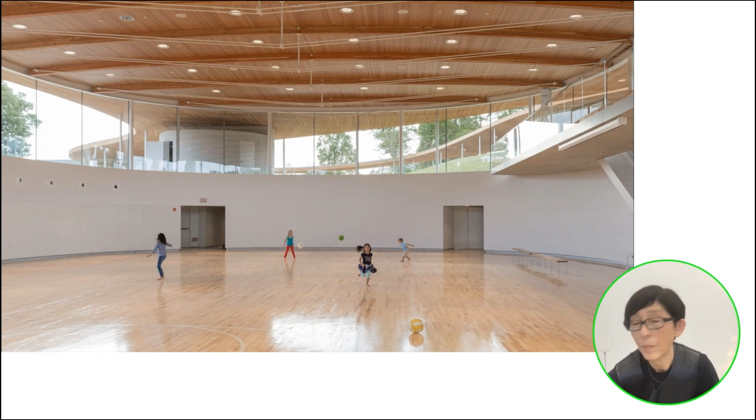The program includes a multi-purpose hall, community gathering space and library, as well as an athletic field and the BBQ courtyard in the landscape, and a gymnasium sunken in the ground.

This is our design for the Sydney Modern in Australia, near the waterfront. It is a horizontal building at the scale of the park nearby. The site is complex: it is over the highway and old oil tanks. There are some important trees that help to determine the shape of the building.

We created layers that follow the steps of the landscape, introducing many public routes through the site, both inside and outside. It is an architecture of terraces that blend into the surroundings.

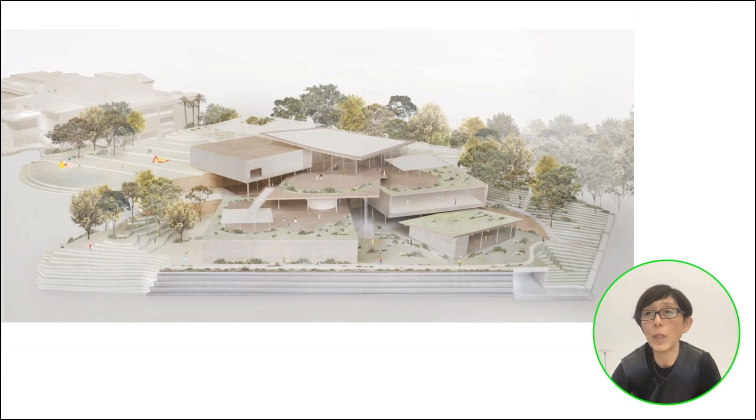It is now under construction. This view is from the entrance foyer. You can see the landscape on each level through the continuous atrium. And here you can see how the exhibition space opens, with a new view toward the sea.

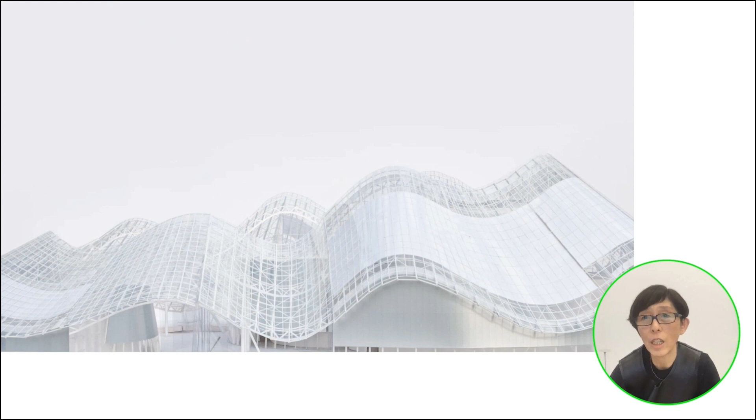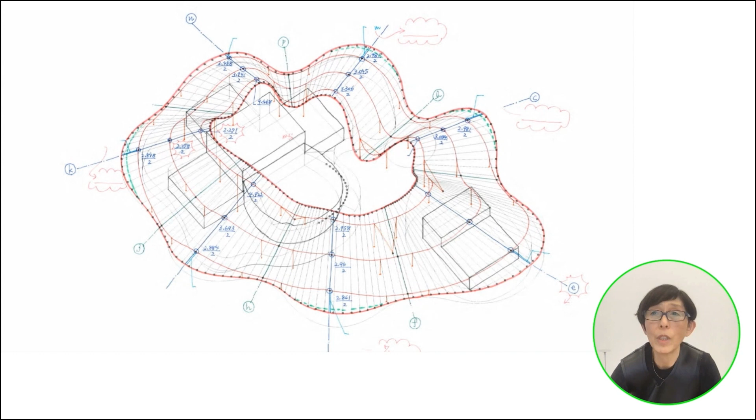This is our design for the Suzhou Shishan Square Art Theater and Museum in China. We tried to make a large canopy in the park. This canopy is a lobby for the two halls. The roof goes up and down softly, creating a diverse range of spaces. At the heart of it is a main hall. Here you can see the canopy and the continuity between external and internal space.

We are also very interested in cities and their different layers. This is the new museum in the US. We designed a series of stacked boxes that shift as you move between floors. In this way, we opened up the museum to interact with its surroundings, and the form echoed the pattern of buildings in New York. The facade is covered in metal mesh and was inspired by the industrial history of the area.

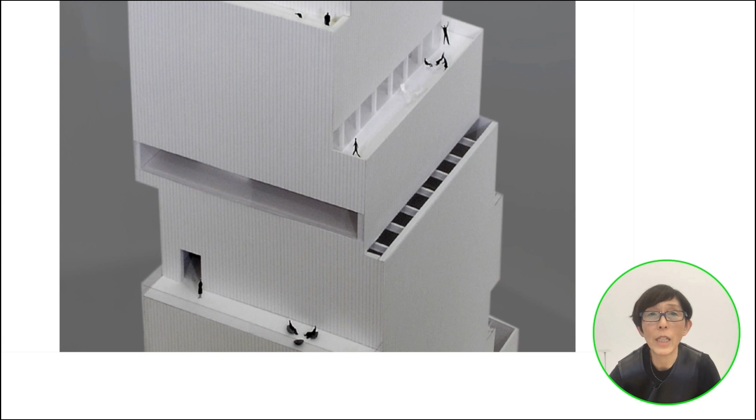Inside, each of the spaces has its own proportions and relationship to the city. This shows the entrance—we imagined that the street would extend to the lobby of the museum. This shows the terrace and how it opened to the city. Each facade has its own relationship to the city.

This is our design for La Samaritaine, a mixed-use building that includes a department store, offices, social housing, and a hotel. This site is in the very center of Paris, surrounded by history. The new facade is a curved wall of glass. The waves are defined by the rhythm of neighboring Haussmann windows. When you look down the street, you feel continuity. Our intention was to blur old and new to create a different landscape. The layers of the facade create deep reflection that changes according to sun patterns and time of day.

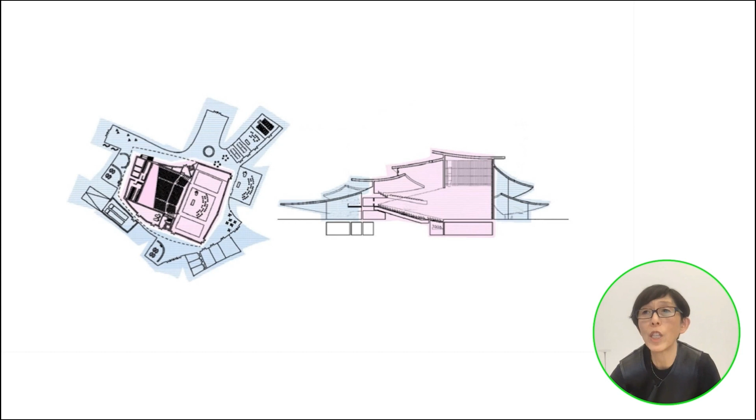This is our design for the Tsuruoka Concert Hall in Japan. We were inspired by the traditional roof architecture around the site, also by the mountains in the background. At the center is a large hall, surrounded by smaller spaces, each with its own roof. This creates many different types of space, from the very small to the very big—from low ceilings and bright spaces at the edge, to very high ceilings and a more intimate character in the main hall. It creates a stepped interior landscape.

We have always been interested in the idea that architecture can be like a park. In a park, there are many people of different ages with different purposes. Each cluster enjoys spending time doing its own thing, but the park gives them a sense that they are not alone, they are also with others. There is a respect for diversity. In this way, I think the park is a miniature of the city, and we try to create this atmosphere in our buildings. We try to do this in three main ways.

The first is by creating smooth and free circulation through the building. Wherever possible, we like to approach from all sides. This is our design for the 21st Century Museum of Contemporary Art in Kanazawa, Japan. It is a circular building with no front and back. People can pass through casually as they move across the neighborhood.

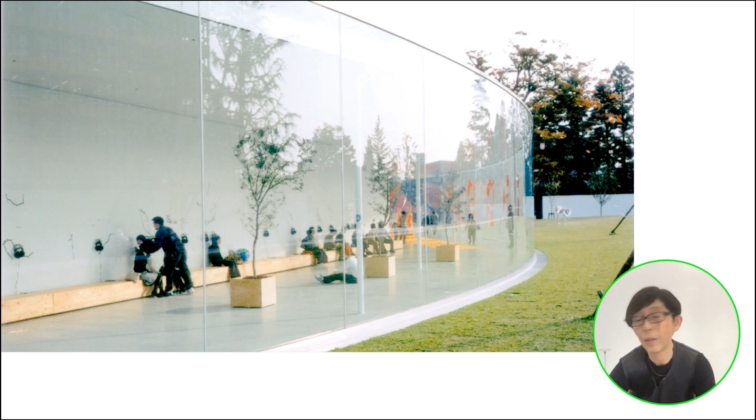The inside is a series of galleries and courtyards, each with its own character—it is like a village. A patio brings light deep into the building, and there is public circulation around the perimeter of the building. The building becomes part of the neighborhood.

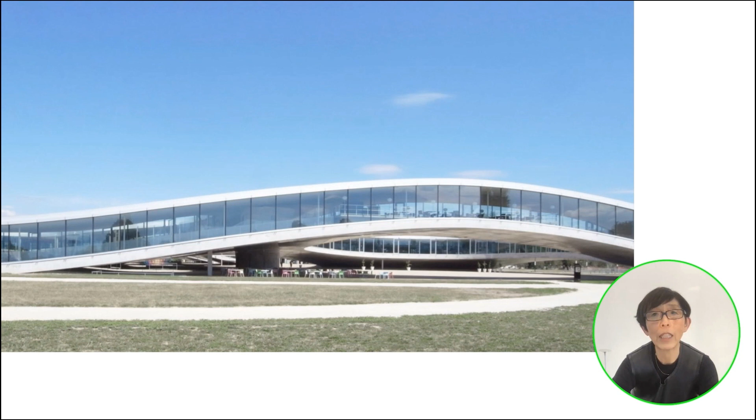The hill in the building separates one activity from another. You discover them as you move through the building. The shape of the building echoes the mountains beyond the lake.

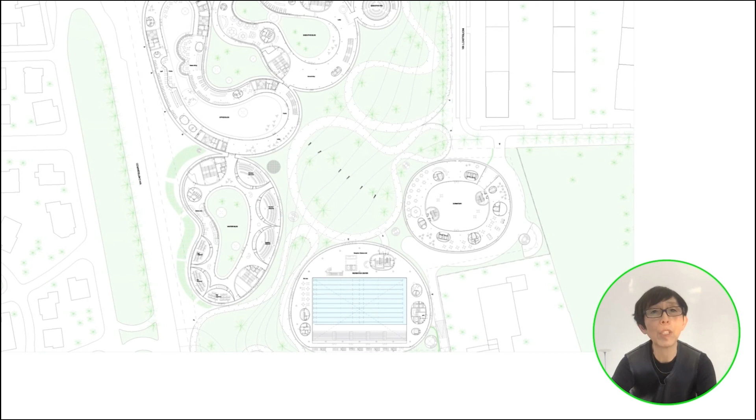The clusters blend together through the layers of glass and extend into gardens on all sides. Here you can see how they come together to form a park.

At a very different scale, this is my design for the Inujima Art House project on an island in Japan. Wherever possible, we kept the old houses and renovated them—this approach creates a dialogue between old and new. When the existing buildings were too damaged, we replaced them with small acrylic pavilions that become exhibition spaces. This is a beautiful garden we propose as one of the interventions. It is a place where the residents can meet and discuss the future of the island.

The third way we create park-like architecture is by creating soft boundaries. This is our design for the glass pavilion in Toledo, where many layers of glass bring reflection and nature into the building. We built a big flat roof to give the feeling of one space. Under this roof, we divided the spaces with glass walls that reflect the internal spaces and the surroundings.

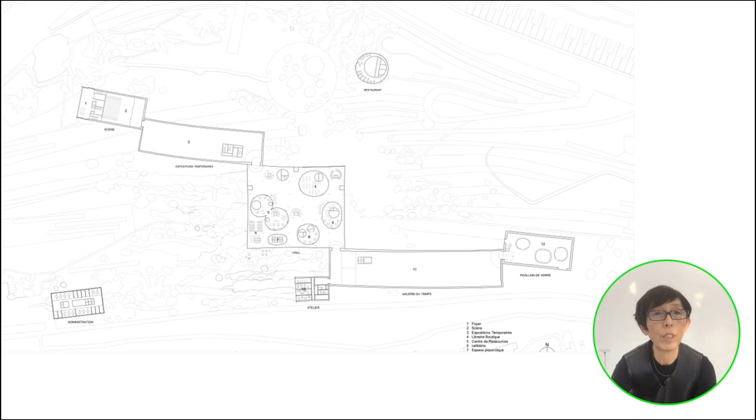Function in the main hall is given its own glass partitions. They create soft boundaries in a one-room space. Inside the main gallery space, the artworks are freely distributed, creating a new landscape people can move through as they choose.

As you move through the long 120-meter space, it becomes a journey through time. The softly reflective aluminum walls also help to dissolve the edge. The aluminum facade also reflects the colors of the sky, dissolving the building into the landscape.

This is our design for the new National Gallery in Hungary. Our intention here is for the display of art to feel like an extension of the park, so the edge is a series of soft boundaries.

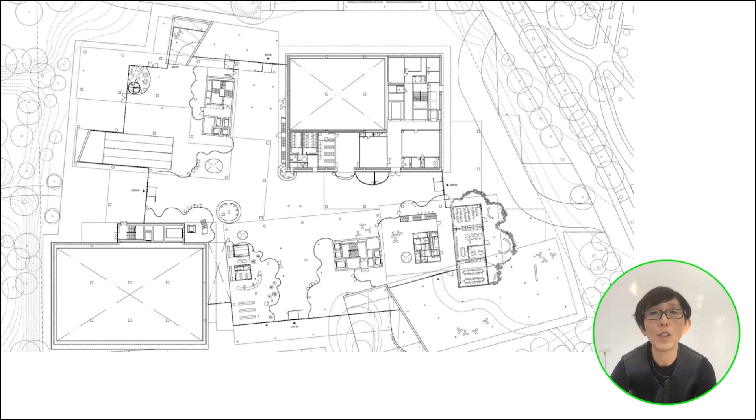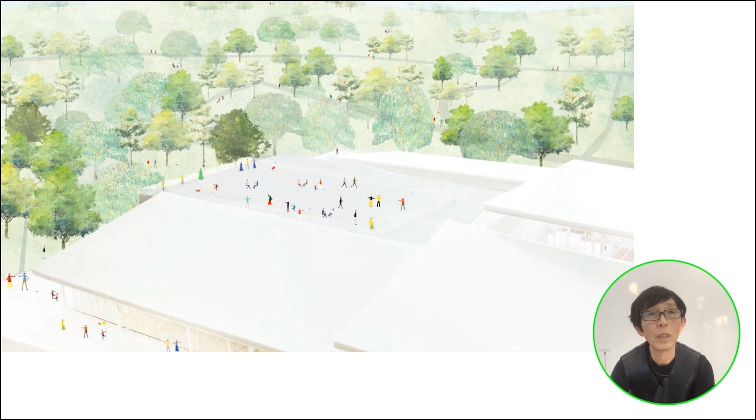As you move across it, you find many different activities. They open onto a series of platforms that creates an open and vibrant space. Like a path, these routes and terraces lead you all the way to the top of the building and offer views out to the park.

We are also keen to bring a specific environmental solution to each project. This is a project in Essen. It is close to an old mine, so we could use geothermal energy to heat the building. We developed a new system where the geothermal tubes are embedded in the concrete facade.

Here you can see the system under construction. This means we could create a very thin facade that makes the big blocks appear transparent, both from inside and outside. Bocconi achieved a LEED Platinum certificate.

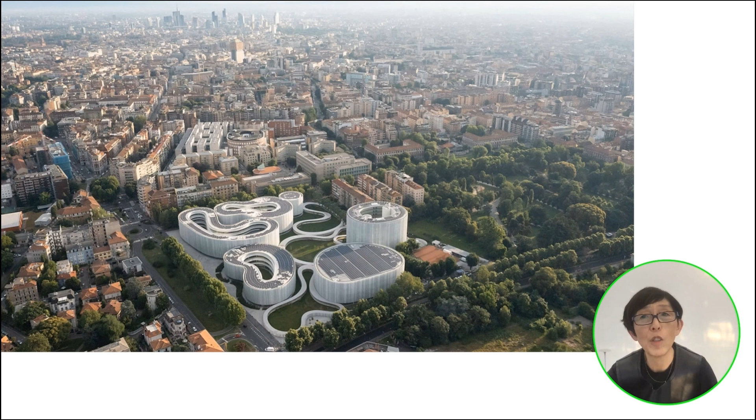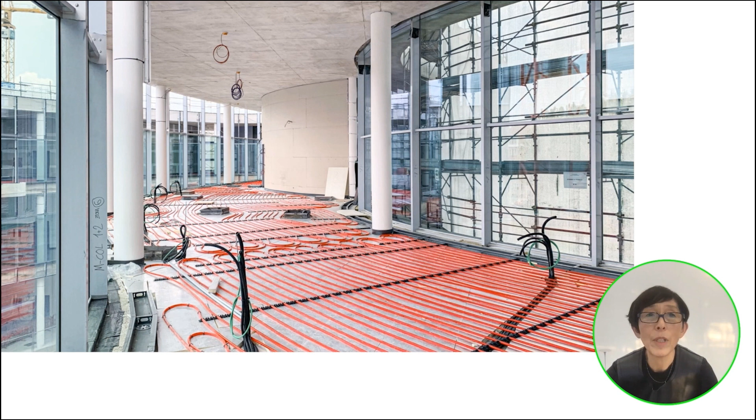In this photo, you can see the roof with the PV panels that provide energy to the building. This image shows the installation for the underfloor heating system using a geothermal source. While here, we use separate machines for each classroom to avoid a centralized system. This was very efficient in terms of energy consumption.

This photo shows the shading along the windows. We also use a mesh for the upper floors to protect the building from the solar gain and optimize the thermal performance.

Again, this is the Sydney project. When complete, it will be the first public art museum in Australia to achieve the highest environmental standard for design, with a 6-star Green Star rating.

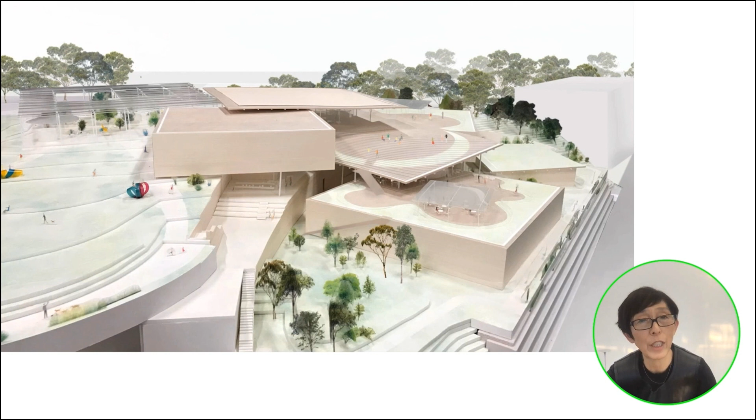Thank you very much. So thanks for that lecture, and we fortunately had a chance to ask a follow-up question, which is: buildings can significantly change the landscape of the city. The site proposal has 3 different elevations from the river to the railway track. How much should cultural venues change this kind of urban landscape?

This type of project should work on many levels: urban scale, neighborhood scale, human scale. At the urban scale, the importance of architecture is to create a sense of place. This type of venue can become a symbol of change and regeneration, a new image for the city. This project is an opportunity to transform a traffic intersection that sits in a pivot position on the river. It shows continuity with its environment and the local culture, but at the same time creates a new landscape.

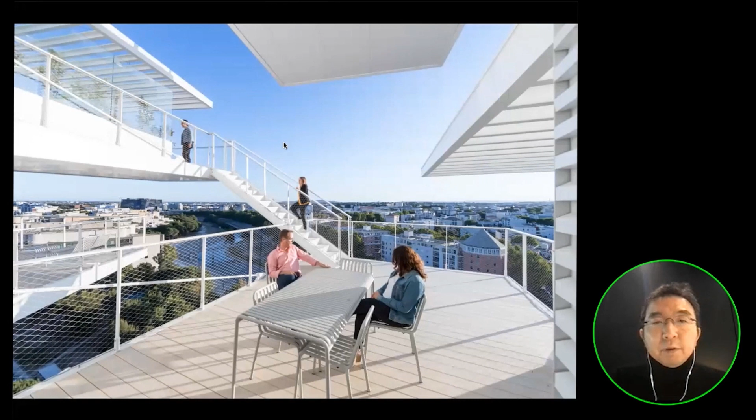This is another view of the balconies. Sometimes the apartment is a duplex with 2 levels, and then the balcony is 2 levels, linked to each other. This is alongside the river, so we respect the flow of the green areas, green parks, even within our plot.

So that is why the building is more close to the roundabout, respecting the view from the apartment above. And then finally, the shape is more like a curved organic shape, which is why we have a softly organic expression together with the balconies.

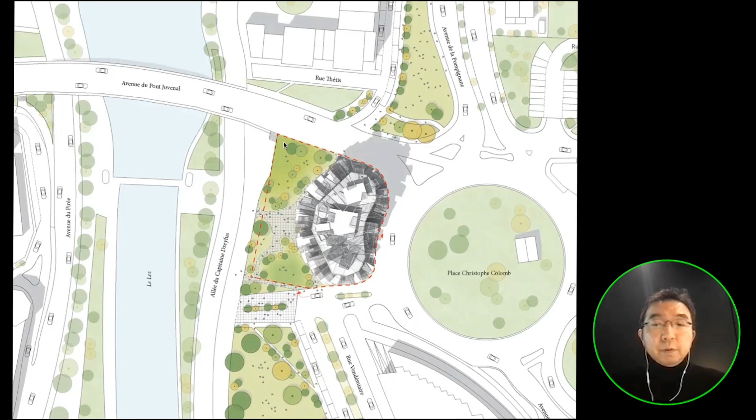You can see, even from outside, not only between the people who are living there but for the people of the surrounding neighborhood, this apartment is very open. So people can feel they are living together with us. It's not like isolated volumes of buildings, but more like an open field.

It always has interfaces to make communications to the neighbors, to the people living there. So this kind of feeling, the many different links, relationships, connections, and organic interrelationships are the very important point for this project. Again, yeah, this is a view.

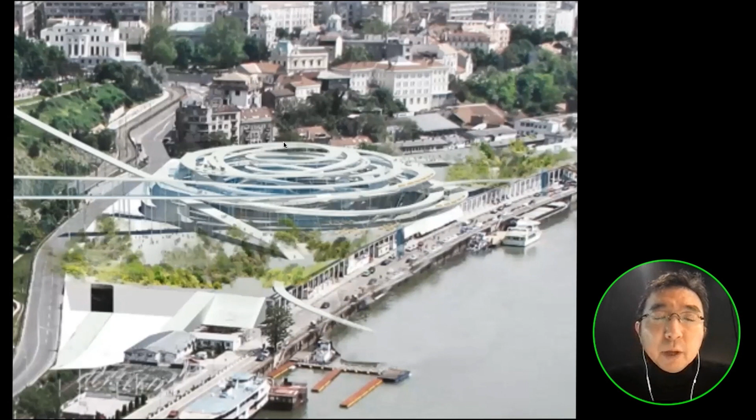So the second one, it's from more than 10 years ago, was a cultural complex right next to the river in Belgrade, the Sava River. This is the view, and the location was very special because it's right next to the old city of Belgrade, and on the left hand you have a heritage fortress area.

And on the front side you have a river. So historically, geographically, the surrounding is quite interesting. And then they wanted to have this kind of urban plaza with the cultural and commercial programs in it.

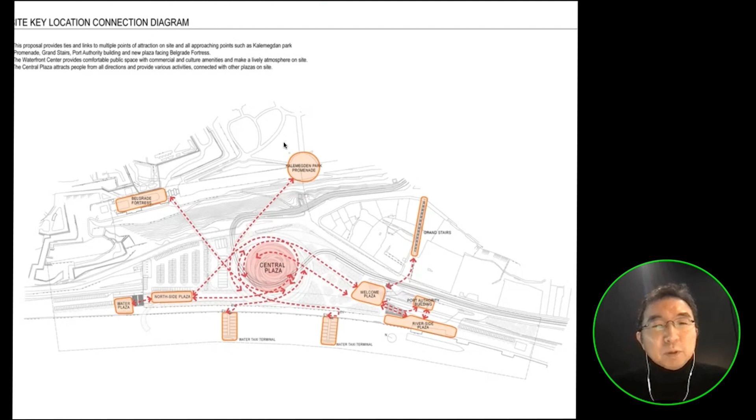This was also intended to be like the hub for the traffic. So the trams, the taxis, water taxis, and the buses, and of course the pedestrians - all of those kinds of mobility are coming here together to make the junction and the links and so on.

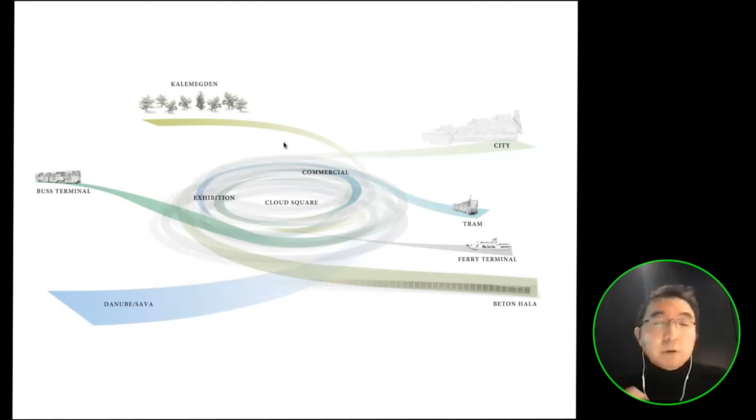So we thought about the characteristics of the plot and the characteristics of the programs - it's like all of them are flow, in a sense: the flow of the river, the flow of the traffic, and the flow of the histories. And then all the flows come here to make a spiral, to create a really central plaza in the middle.

But it's not like a static plaza - it's more like a plaza with a dynamism in it. So keeping many different flows from many different directions, linking the old city to the fortress, or the river to the shopping areas - all of those flows are coming here. So it's like a hub of the flow.

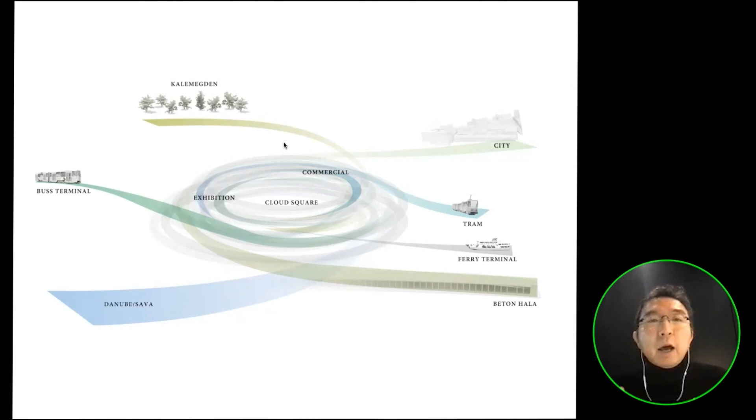And then we thought it was a fantastic idea to give the shape of this flow itself as architecture, so the flow itself becomes architecture itself. That is why finally we made those kinds of spiral flows, which are like floating slabs. And then we have the interior spaces between those slabs, and in the middle we have a central plaza.

So that all the people can see this central focal point, and all of those trams and traffic are coming along those flows. So all of the functions and all of those kinds of reactions to the surroundings are solved by the architectural language of the flow.

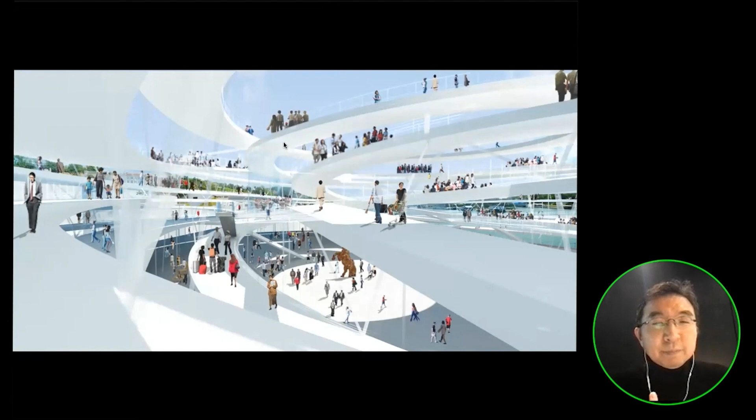So this is the view in the middle of the slabs, the floating slabs. It's like an amazing mixture of architecture and landscape and an urban strategy, and plaza and street and the flow itself. So there are no clear divisions between architecture and the city and the landscape here, but all of them are melting together.

Yeah, we won the first prize in this competition, but finally, unfortunately, the project was stopped. Still, for me, it's quite an exciting project, because it is something beyond the normal, single definition of architecture - it relates more to the surrounding context and starts to melt all of the urban situation, architecture, human behaviors, human flows, and the landscaping and nature together to create the place and a field for the people.

So this is the last one I will introduce today. It is just finished in Budapest, the Forest of the Music. It's a house of Hungarian music.

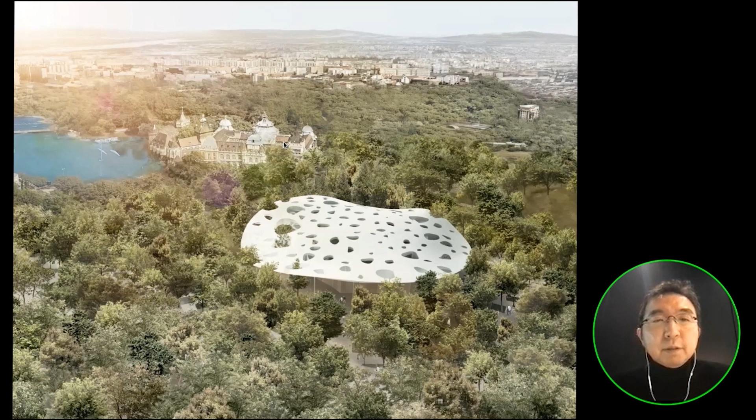This is the rendering we made for the competition. The site is in the middle of a beautiful park, a beautiful forest, and the whole park has so many different cultural buildings. Some of them are quite old, and some could be new ones, like our building. This forest feeling is the starting point of our inspiration.

We thought it could be like a dreamlike experience to listen to music in the middle of the forest without any architecture, playing in the middle of the forest, playing the music, and then listening to it. That was the very starting point. And then we tried to translate the forest into architecture.

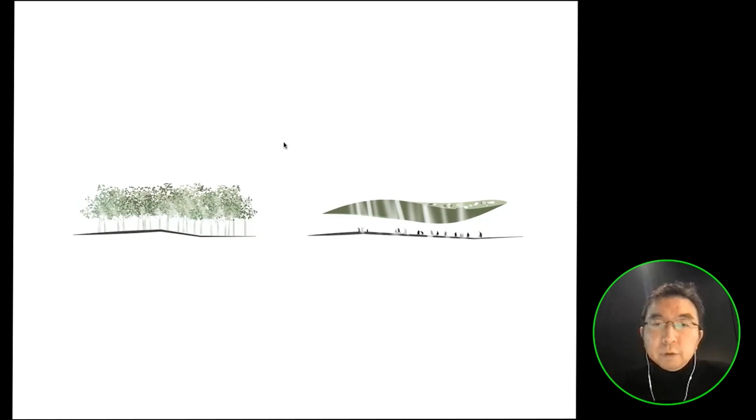Of course, we had to satisfy complicated functions, because we have the music museum, music performance spaces, and music education spaces. Finally we made a large floating roof. On the basement we have a large, huge exhibition space for the museum, and within the roof we have education programs.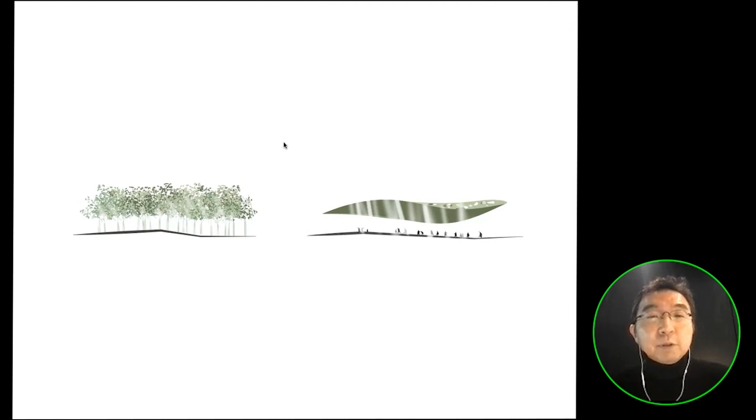On the ground level, covered by the roof, we have a transparent music performance space which is really open to the forest. So people could feel they are playing music in the middle of the forest, and the audience could feel like they're listening to the music and the concert in the middle of the forest.

So this is the site plan, and these are diagrams showing the layout of the programs. Finally, this spring, it's done.

It's floating volumes, and these transparent areas on the ground level are like the open foyer, lobby, and performance space, like a music hall. This is an aerial view.

Then in the spring, all the leaves get green, and it will be really in the middle of the green forest. So this is the roof photo.

We have many openings on the roof. Some of them are skylights, some of them are perforating to let daylight into the concert hall, and some of them are just open holes, which have existing trees going through the roof.

So it's more like not dividing the architecture and the forest, but the architecture and forest are melting, intersecting with each other, coexisting with each other.

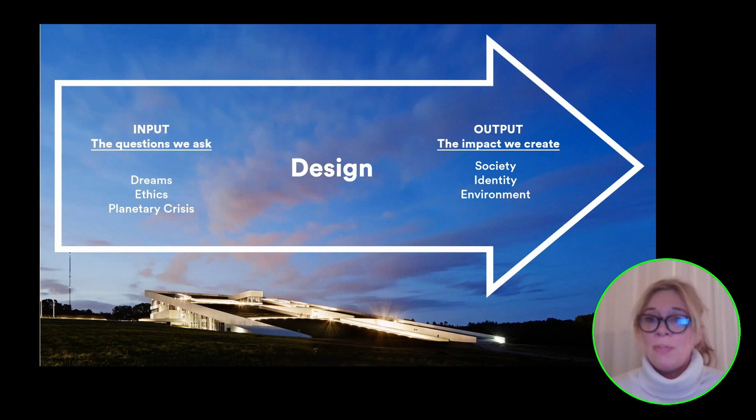And afterwards we talk about the impact we create, both on society, on cultural identity, but also environmental issues. So design is somehow a medium actually to achieve things. And exactly both...

Urbanism and cultural buildings are the two typologies in architecture that I would say create the most emotions and touch upon a society's ethics. This is where you involve society, you involve people, because it is public places.

And these are just two examples. It's one from Harpa, a concert hall I will show later, and then it's from Gdansk Imperial Shipyard. And these two images also show that both cultural buildings and public spaces are gathering places. This is also where people create memories and meaningful experiences. And this is why these places become so important, not only for cities and nations, but also for architects.

This is why we are all here tonight. And one example is, of course, the Gdansk Imperial Shipyard. This is where there was a labor strike in 1970, and it actually led to improvement of labor rights and political structure.

So, of course, when we did the urban transformation of that shipyard, that was in our mind, to unleash that cultural heritage, working with a new agenda for the Gdansk area. So, of course, building upon a place, on a site and a destination, and building towards a new future. And these are some of the images from the area.

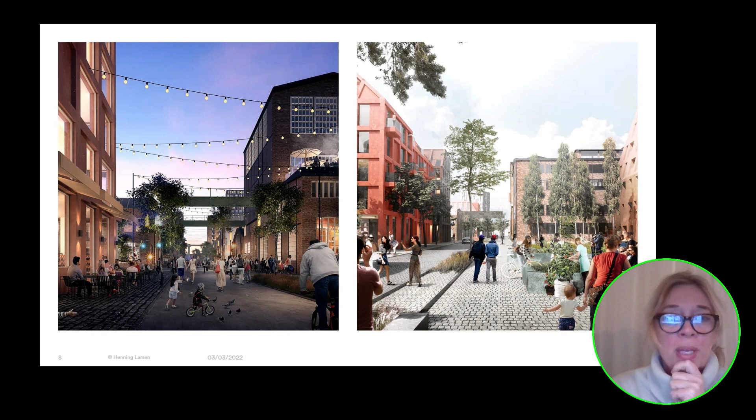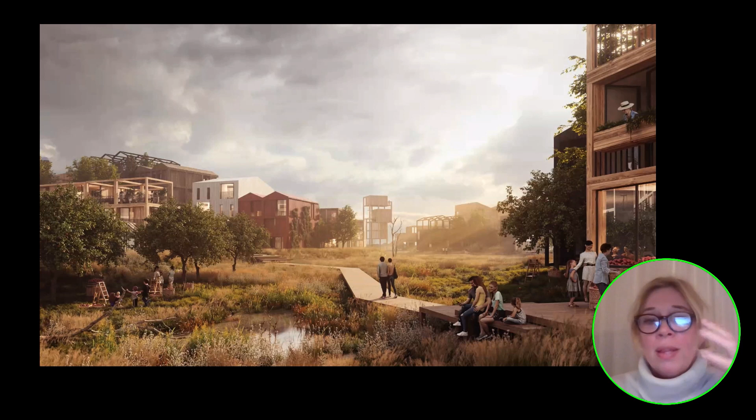And this is why we created these three very organic islands where nature could flow in between these small islands. And you would also create a U-shape block typology where nature could go into these courtyards. That was very important for us, that the nature was very dominant in the plan.

And the whole city is for 5,000 inhabitants. It's all made of wood - that's a different story that I'm not going to talk about now. But for us doing this, the urban approach here was preservation of biodiversity and actually reinforcing that. And that led to a lot of good discussions with all citizens on how design can also benefit to create a future-proof urban scheme.

And let me move into architecture, because design and architecture can be a medium to create cultural and societal change. I think we're all aware of this. And I think what is important for us when we work with this, we have to think about exactly how we do the design. And this is the opera in Copenhagen we did many years ago.

What you see here is that this place has become a destination, not because of the auditorium and the operas taking place inside the building, but because of the big roof, placement at the inner harbor of Copenhagen, and all the things going on around this roof.

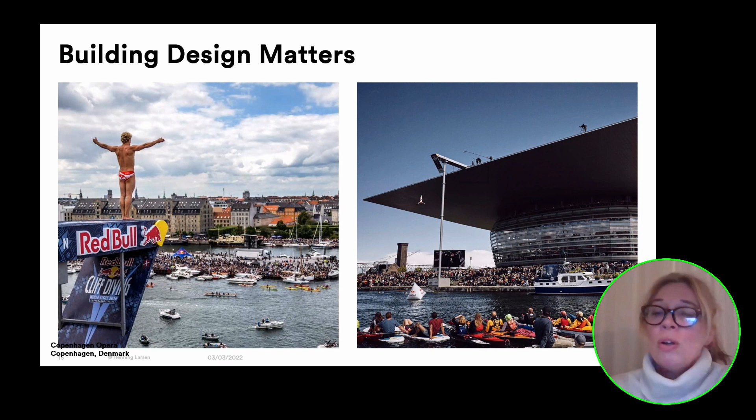So suddenly you will have a Red Bull competition from the roof diving into the harbor. And of course the opera becomes the backdrop for this event. It's also about creating plazas around the architecture, having the possibility of actually making outdoor performances, or having a more open-ended, wild, you can say art culture around the building. So you will have something that is very formal, and you will have something that is not so formal and more unprogrammed.

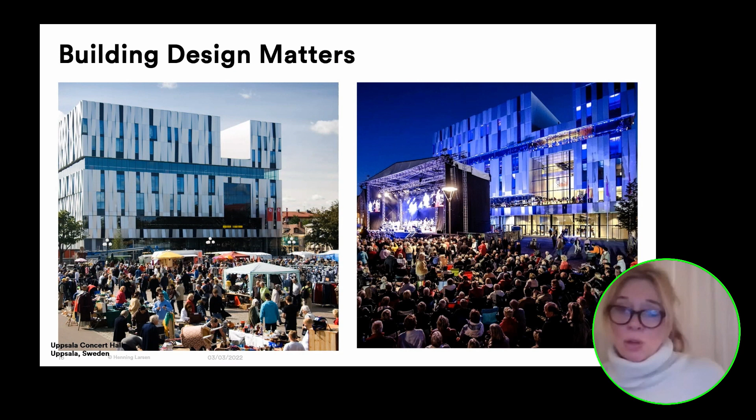But by actually turning this into the city, we made a plaza in front of the building, and this building became a community space for Icelandic people. So going from a more formal way of understanding cultural buildings, we broke the building down a little to have the foyer and the lobby activities in front of the house, becoming a public area that could be inhabited all day and all night, during all week.

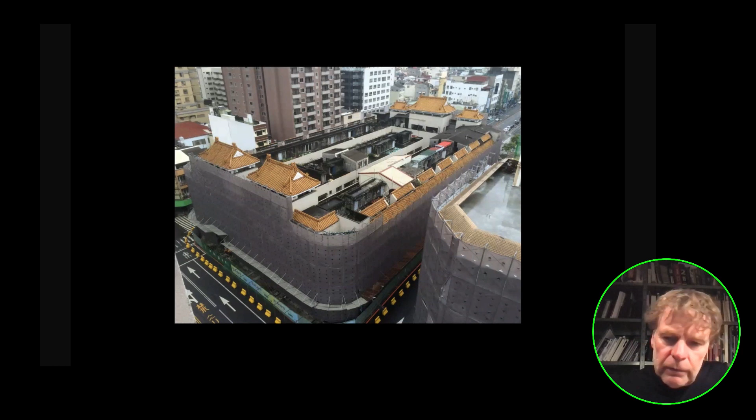So we were asked to think about this Chinese department store and transform it into a park. So what to do when you have this giant building? You ruin it. Literally, you turn it into a place of memory, and you flood it. Why flooding? Because then it can become a cooler place, cooling down the city and therefore attracting people. I was surprised by this simple act of transforming this building into a swimmable ruin, and maybe because people liked this drop in temperature.

It was also a moment that Asian culture suddenly popped out in European dress codes. I mean, this could have been in Denmark, but you never expected that in Taiwan. It was a place where we concentrated on the materials so that you would have a dengue-free environment where you could swim all over the year, day and night.

So here you see people queuing up at a certain moment to go into this park, and it's completely open and free, and you don't have to pay anything, and there is no cafe or bar. You take your own sandwiches and your own rice and sit and watch each other and enjoy simply the temperature drop in that case. So learning from that, how to attract people and how to comfort them, how to give them this freedom, and how to make it hyper pleasant in a way that it's not like a shopping mall, of course, because they try to do that also, but the distinction is freedom is what we try to attend to do in Tainan.

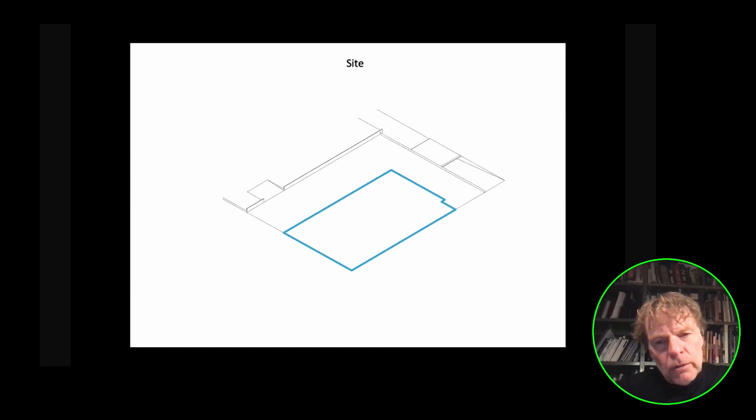On this park, in the middle of the institutes, you have to make a form that doesn't copy the others, or that absorbs everybody to participate in this operation. So how to do that is when you have this site, when you have to respect some of the logistics on the site. And this program is fat, 15,000 square meters on a park.

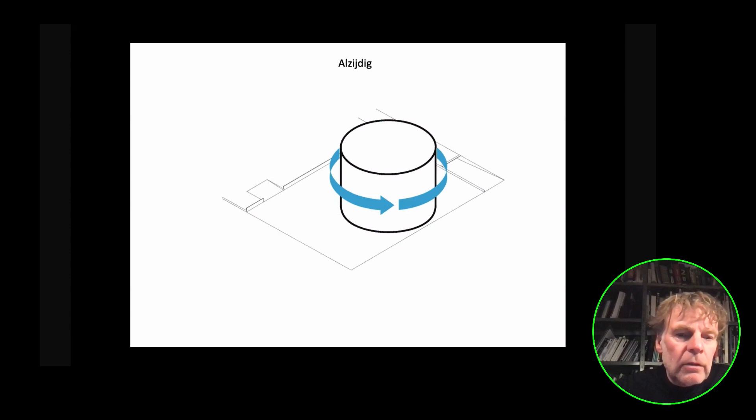How can you do that? How can I keep my innocence as a landscape architect to allow for a building that is loving the landscape, even with a mainly enclosed piece? So we made it turn into a round building so that you can walk around, no dangerous corners.

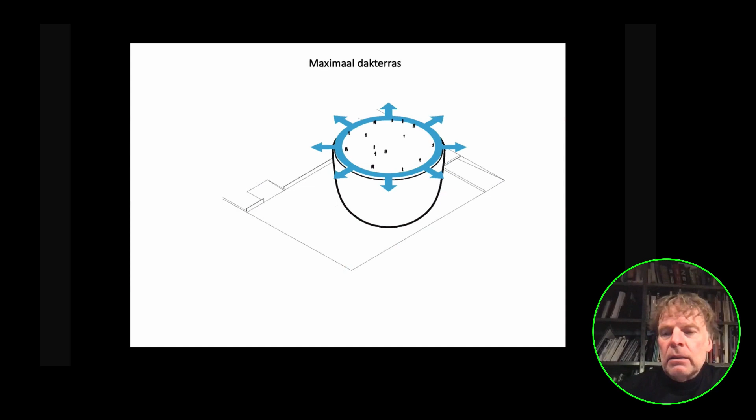We made the footprint almost nothing so that water can go below and the plaza becomes the biggest. And then you can have also like a roof, which is the biggest possible by not making it too fat. That leads to walks around it, like you can see here.

Then we clad it with, say, mirrorish glass, and that has an effect that visually you have a dramatic enlargement of the site. You can reflect the plaza, you can look around the corner, you can enlarge the sky, like in the famous Dutch paintings of the 17th century.

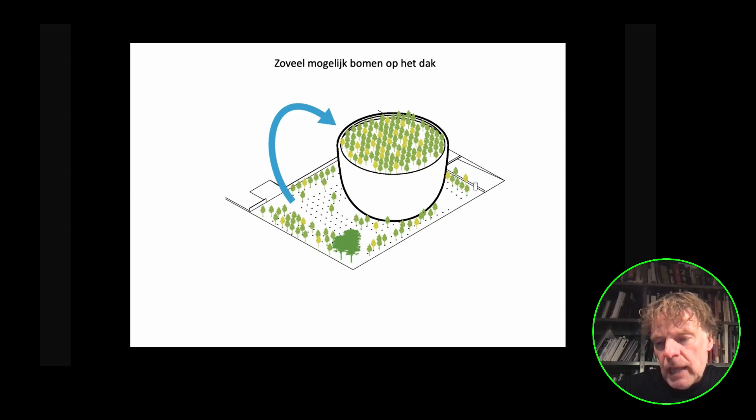And then you have also a place where you reuse the old trees and put them on top of this depot, to compensate this act of living with nature and treating it well. That creates a new landscape on the floor for activities, and it forms like a new room in the sequence of gardens of the museum park.

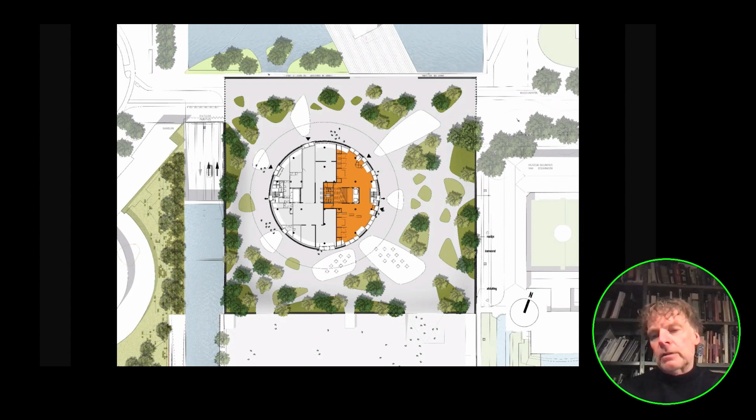And they just come into this new forest on the ground. In orange, you see the public part, and in the other part is the private part, as small as possible. You go up to the art, which is higher, of course, +7 meters, to protect itself against the sea.

You come in a central void that goes all through the building, where you can walk around, so that you can go into all the different climates, 5 climates in total, because of the different art pieces, and you travel through the central void where things come out and are shown to the world, day and night.

The museum is open. And on every spot, there is an extra activity to restore the building, to have a school class, to look at elements, to share it. And you can enter every piece wherever you want.

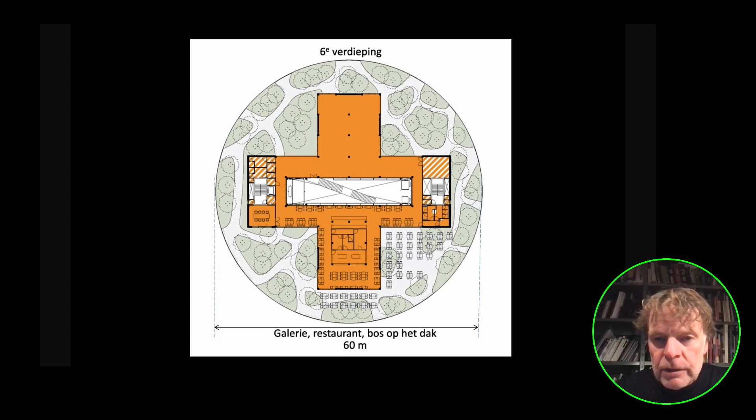And there you can open up the fences, and you can find your painting of what you would like, and end up of your journey in the gardens where art is exhibited, in the gallery restaurant where art is also participating. So it's a true, say, piece of collaboration.

It is, as I said, also a project with many projects in a project. And I want to express that because I think public art, like public buildings, are inviting people, and that would mean that these many collaborations could lead also to a new Gesamtkunstwerk.

We presented that in the Monocle at one moment, all these authors that are participating. I'm just an urbanist in that sense and try to make awake all these different artists that are working on it.

Yes, the word Gesamtkunstwerk becomes then another word. It's not made by one person, like in Austrian times, it becomes made by many. And I'll present some of them to you.

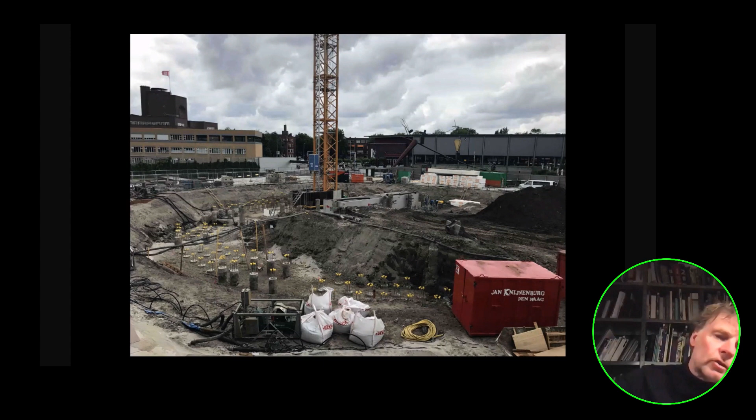This is the vessel makers. It's not an artist group, they're engineers. In order to not touch the water, the thinnest piles had to be invented. And on top of that, this vessel is made as an Ark of Noah, due to its balance of weight and floating, making this vessel a tool that can survive the floods in the future.

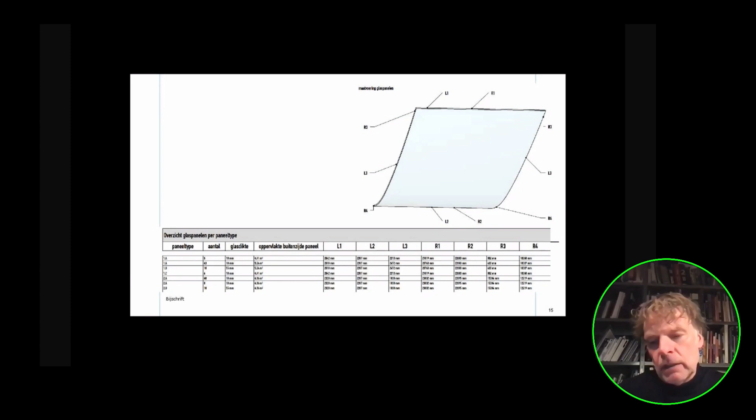We have the mirror makers that were based in China, where we bent glass in all directions and invented a new kind of mirror material inside the layers, so it could be shipped, tested, and awarded. No brown glass; it should be as neutral as possible. And the good thing is, it's recyclable. You can ship it back, and then you can make it better when it doesn't fit.

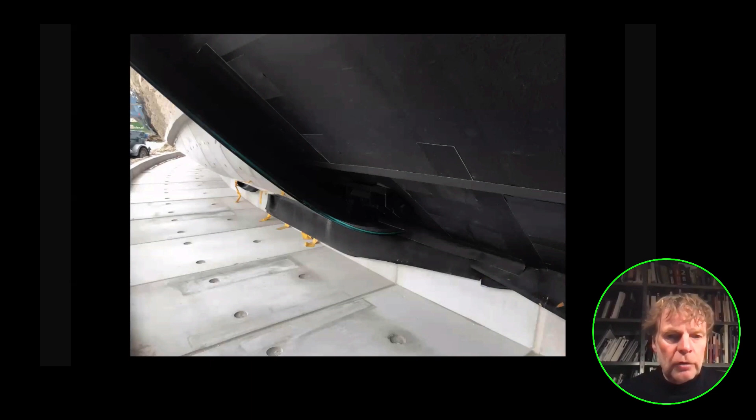And of course, it should not touch the earth, so the lowest part is also horizontal and has triple curves. The door makers somehow made this kind of simsalabim doors, like Thunderbirds 5, where you could go in and wait for the door to open. That's also a group of people that could only do it themselves.

And of course, the curators made, in between our stairs, so many boxes where you can meet art from different perspectives. You can look from the front, to the back. You see the signatures, you see how they are pulled out of the archives and then shown in a certain way for curators, for other kinds of museums.

The windows are an important piece of art. They show the art in different climates. And of course, this is how to pull out the art in an almost democratic way. You can find your own collection that comes back to it. It's a project within a project to understand that.

And then people show their pieces of collection, like this carpet on which you can stand and look down or up. But also the food makers are part of it, making these kinds of flippable tables to live with art in the environment.

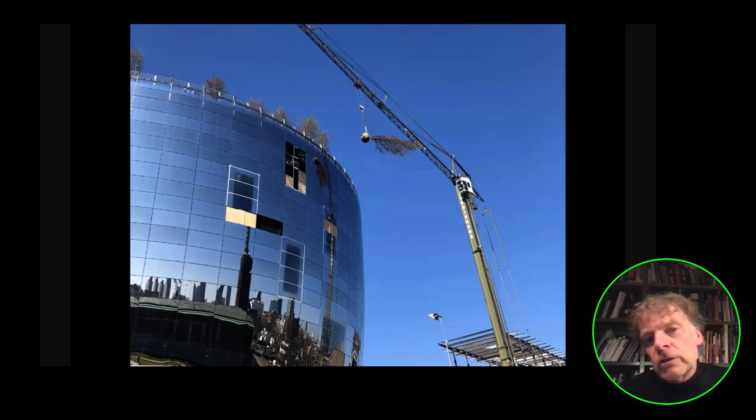Or the forest makers, landscape architects who train trees to grow horizontally, put them on top, and unfold the roots so they kiss each other. Then in a year, you have this effect, and even with last week's storms, it becomes like a forest to walk in. Next year, you'll see art emerging from this forest, placed in all those in-between spaces where the archive can show itself.

And with that, I think we have this group portrait of all these collaborators, but also of the city. This is the last, one could say, object in the city that loves all the objects of Rotterdam, and they come together in this place.

I end tonight with Pipilotti Rist in Rotterdam, with the canvas she made, presenting films on top of the plaza with mirrors in the building. It becomes three-dimensional, and she made this experience even more beautiful.

And it's a storyline that appears every night now in Rotterdam, and after COVID it's turning into a place to catch up with each other. And then indeed, reactions: today's Instagrammable pictures, but also this article in the New York Times, which says that Rotterdam, with this picture, has a nicer skyline than Manhattan.

So chapter 4: what can cultural buildings in general do? I'll give some categories. They can be guiding, as these examples try to show. They can be exemplary on many levels: on sustainability, on inclusivity, on beauty, and on politics too—we cannot avoid that part. But maybe most of all, they can help us with hope and perspective, especially these days.

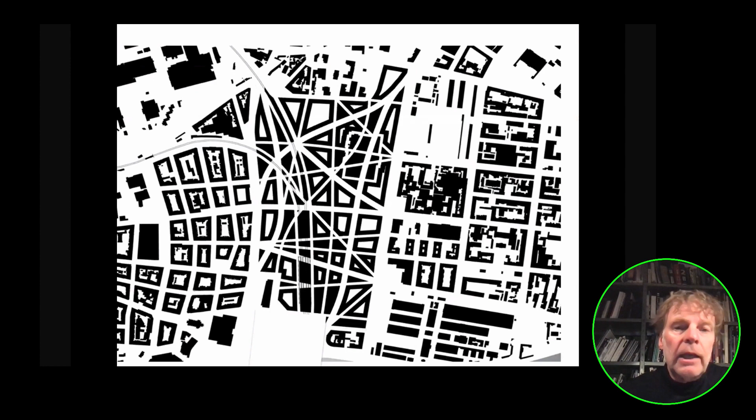2006, I look back to Bubny, where we tried to work on this competition, where this site is now there. And when you look to the site between Letna and Holešovice, it is we try to make as many streets that link to each other, and then keep a place open on the Vltava to present itself. That would transform this into a unification of the different districts. Prague would continue while keeping a place to celebrate on the background of this city.

It's new jewels. And then 2021, I'm happy that that is somehow happening in another language, in architecture, where in red you see the new place appearing with the background Bubny as a continuity. It's in itself also a paradox of continuity and speaking out is happening on that side.

Chapter 7, again, the paradox on beauty that I see in Prague and in the Czech Republic. You see, of course, cultural institutions like this, which are stable, classical in its sense, with an interior that has Baroque-ish elements in its most beautiful way. On the other hand, you see new kind of modernists coming up with a very poetic way that celebrates some parts of the culture of glass and crystal, and that continues in some of this, say, doubleness of Prague.

When I go into this building, I see incredible art installations made by different artists in glass, where a sea of glass is continuing the Vltava in this project, and where Moser and others do it almost in a cubistic way. I see this also as an ecological paradox between stone and glass that is in this.

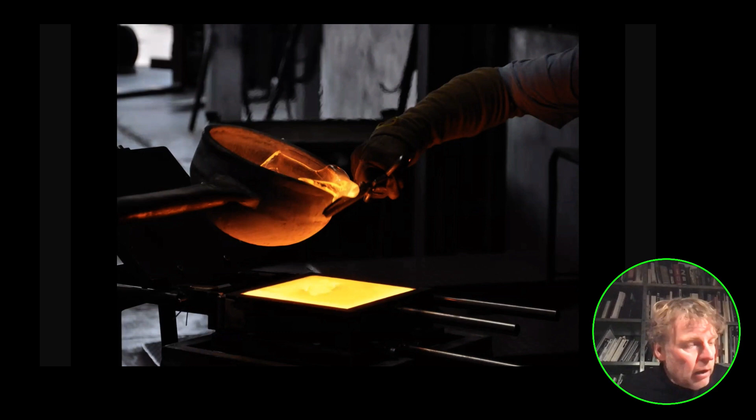And I'll take you for a moment to Amsterdam, where again, I can have glass, I can melt it again, and I can turn it into stones. And for me, somehow, this is a symbolical way of dealing with beauty and stability. Chanel did make it in the crystal houses with us in Amsterdam, where they become solid, where they lighten up, and the interior becomes sprinkled with it. And then when you go obliquely, it opens itself to the world. This Amsterdam house shows also this kind of paradox that we are facing.

Paradoxes are beautiful, and that's the learning lesson of Prague. But of course, it needs courage in the end. And that's my 8th observation on what a public building could do, and especially in Prague, and especially on this moment.

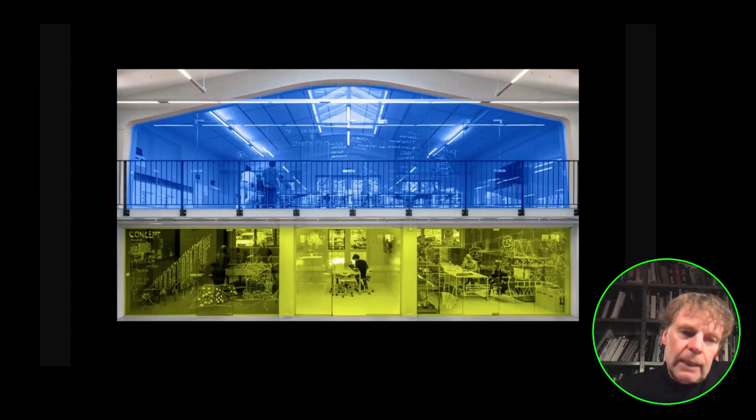Enlarging beauty and art should be responding to that, and by a sparkling, eye and ear catching answer is what we try to do. And then when I take this picture from a cab and look to the other building, how these institutions can somehow not only protest but find an answer to this aspect, then I try to mimic that a little bit in my office the last week, inspired by you, to see that somehow in it. And I see that as a very important part of this coincidence that this competition is happening, to make this yell out of that, which I think is the most public answer that this specific building can do in this time.

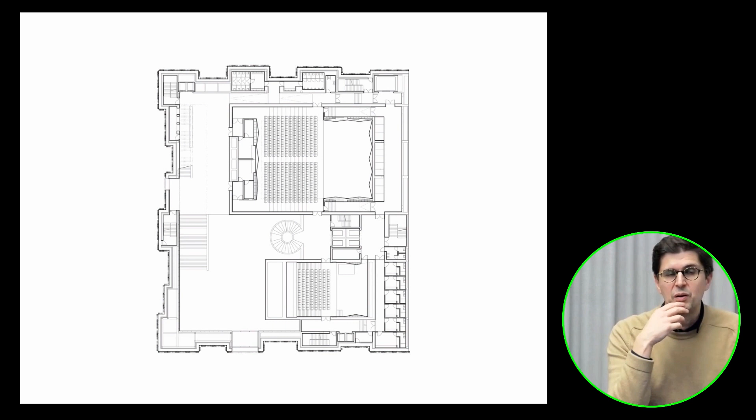Try to recover the importance of an element that expresses somehow a new identity, not just for this neighborhood or this site, but for the city too. In the case of Szczecin, the building plays with references of the surroundings, but also with the idea of freedom, playing with the roofs, playing with the skylight. I think the building tries to express a new identity based on the main characteristics of the site, but at the same time tries to explore how to transmit these ideas in a strong and expressive way.

The Philharmonic is a place that basically needs to fulfill all the interiors with activity, needs to provoke the public, needs to transmit to the public the importance of the site, and that's why the building inside is composed basically with the idea of public space.

The interior of the Philharmonic, in this case in Szczecin, is just a kind of public loop all around the uses of the Philharmonic. It tries to provoke the idea that a square inside the building would be the perfect spot for sharing moments, sharing activities, and sharing the importance of meeting all together in the same place, in a cultural place, in order to listen to jazz, live music, which is the heart or the soul of the program for a philharmonic. And in this case, in Szczecin, that was basically the main target.

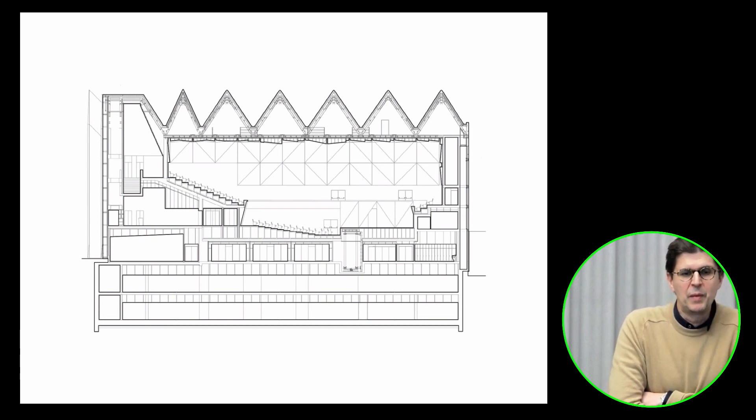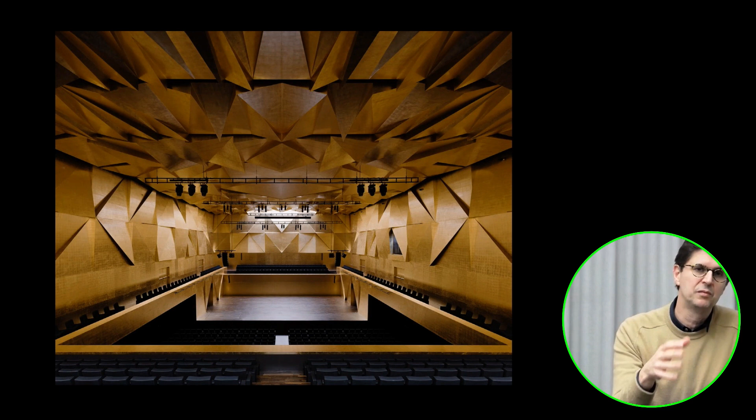How to achieve the best scenario, the best hall, the best spot for the soul of this building, which is basically to play live music. In this case, trying to find a contrast between interior and exterior, trying to play with the expressivity of the materiality, light, trying to play with what we like to define as the fundamentals of our profession. Basically, how to achieve the best space based on the fundamentals: proportion, scale, and natural light.

Outside, the building tries to provoke the attention of the citizens, tries to suggest, tries to seduce the citizens, and tries to provoke the idea that this place is based on the essence of Szczecin, of this site. It tries to recover the importance of the site, and tries to express in a new way this character that we think matches with the neighborhood, that matches with these multiple layers of ages and different styles that compose Szczecin nowadays.

The second sample of public building is a building that we did in Lausanne, in Switzerland. In this case, it's a museum. And somehow it's a different case.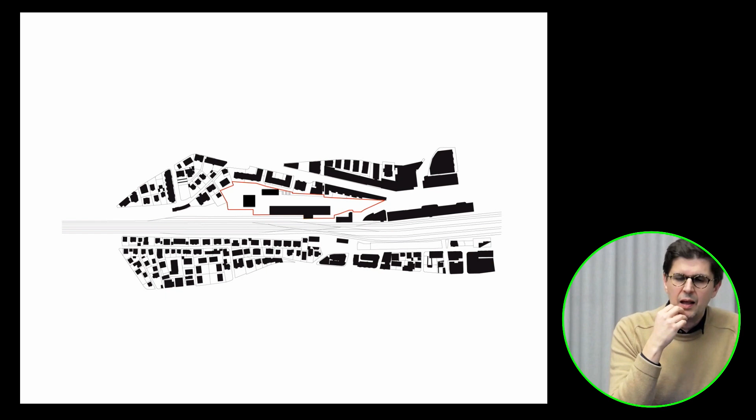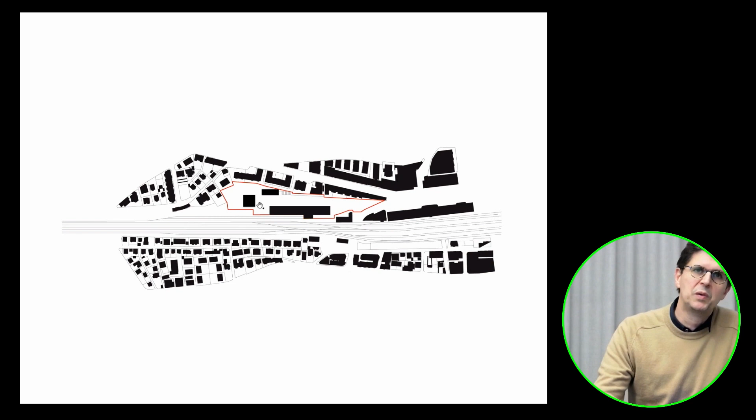It was the idea of public space, the idea of how to look back to the city and how to put the city and the public space as the main target in our design. That's why we decided to forget, for a moment, about the objects that we needed to compose or build, and instead try to propose a public space that could activate the spot where we were working, but at the same time rediscover what was the city and the meaning of this part of the city in Lausanne.

That's why we proposed an approach with very simple architectures, very simple elements that have the intention just to compose the best background for this new public space, a background that tries to protect, that tries to define a clear limit between the train tracks, the dust, the noise, and all the elements that can affect the quality of life within the square, and then suggest a new view of the city characterized by this architecture.

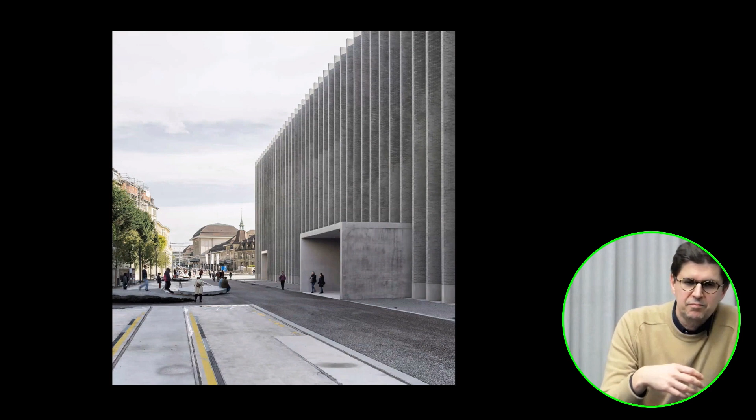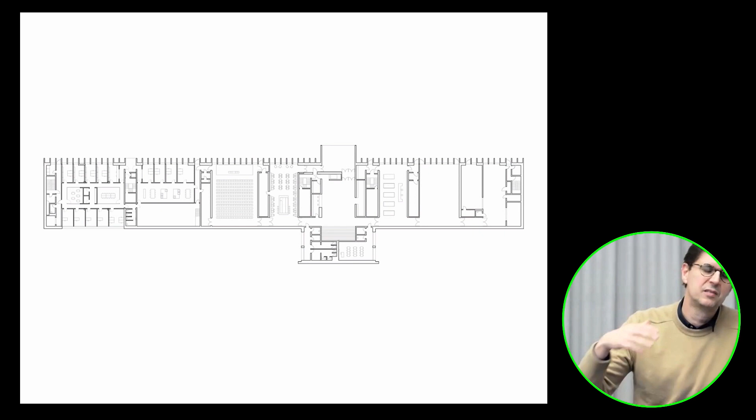An architecture that's built having in mind the reference of the closer context, the atmosphere, and the character that this place had. This place close to the train tracks, where the old warehouses of maintenance of the trains were placed, finally appears somehow in architecture through this kind of rhythm, elements that somehow suggest or remind the same rhythms.

The building basically puts all the attention on the importance of the public space, meaning that all the public uses, direct uses related with the square, are the most public. The building tries, as outside becomes inside, to provoke this new background, looking for the essentials of what a museum is.

I think this is something we always have in mind: try to think about the essence, reflect about the main purpose of what we are doing. In this case, a museum tried to achieve the best background for artworks, the best background for the light, the best background for the experience of somebody looking at the artworks, because that was the main purpose in Lausanne.

Doing it not just with our own references or self-reference, but having in mind that the idea we always build is specific to places where we have to rediscover the uniqueness of the place, trying to achieve references outside, like in the big staircase that connects the temporary galleries with the permanent galleries in the museum, trying to rediscover the importance of what is surrounding us.

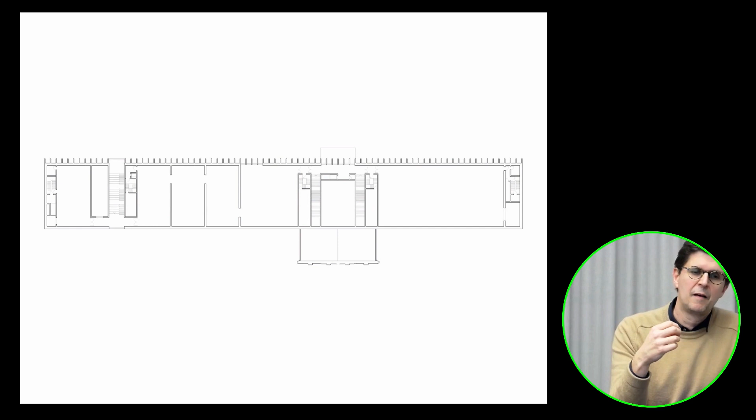But in Lausanne, the main responsibility of the building was to rediscover this part of the city, to understand that the building is just the engine to provoke that public activity around the idea of culture can blow up.

The temporary galleries on top of the building are simple spaces characterized by natural light. Again, the idea of rhythm, the essence and character of the place appears inside through rhythm and light, and the building expresses toward the exterior the idea that it protects and characterizes the site, trying to achieve the best public space we could achieve in the heart of the city.

The third sample is a completely different scale. It's a smaller building, but it reflects an idea that I think will be important in the Prague competition too. This building is the Tanzhaus in Zurich, just in front of the Limmat River, in a neighborhood characterized not just by housing, not just by beautiful architecture, but by landscape.

It's characterized by infrastructure, by the bridge for the train, the bath area, different scales. It's a landscape composed in a very heterogeneous way.

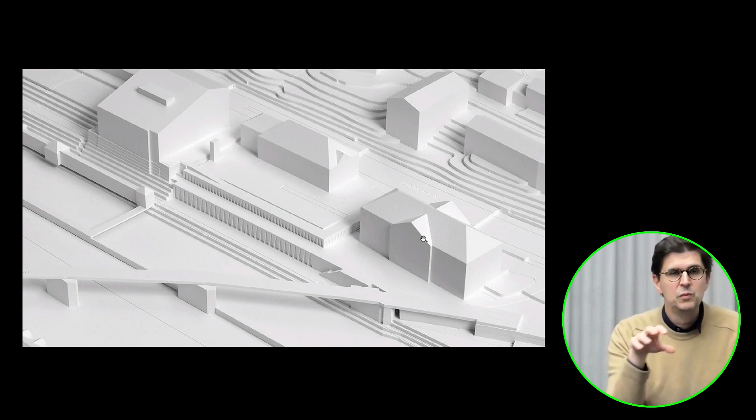Within this place, between three small buildings - an office building, a house apartments building, and a kindergarten - we had to build the new house for the dance school, with a very small program: just a small theater for 150 people, 3 studios for around 20 people each, and a program for the offices and wardrobes for the artists.

In this project it was clear for us that we had to deal with the surroundings, how to connect the different levels, how to deal with the river, how to compose something that could activate, again like in Lausanne or in Stettin, the public life, how to propose a public space.

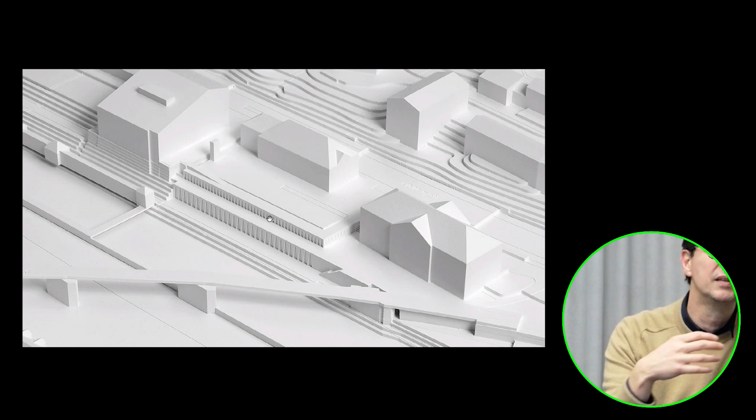And how to do it with an architecture that shouldn't be too imposing, because that would mean destroying the relationship between these three buildings, and how to compose something that, even at such a small scale, could express the importance of the fact that this is a public building, something that needs to provoke culture and public life.

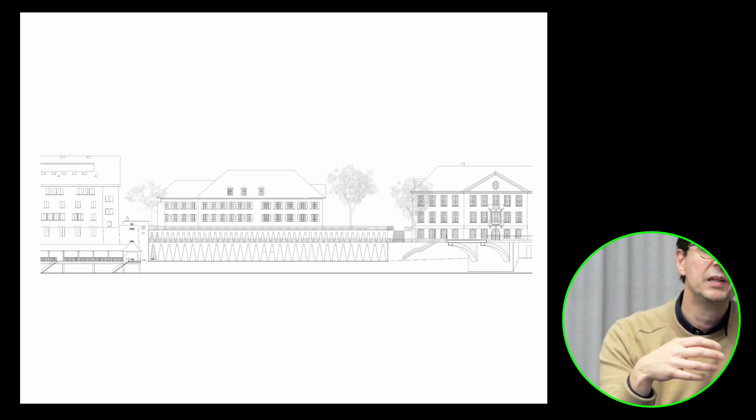In this case, we did it by understanding the building, as I was explaining before, as a landscape. The building appears characterized by this single geometry that defines the attitude of the building facing, in this case, the south side.

Trying to understand that the building needs to express not everything just with its shapes, but blend somehow with the landscape and surroundings, filtering through the greenery in front of us, trying to achieve the right scale, stepping back the building, provoking moments just to let enough space for citizens to move around and contemplate the building, letting architecture establish this background and this filtering through nature and architecture that allows the ensemble to work in a natural way.

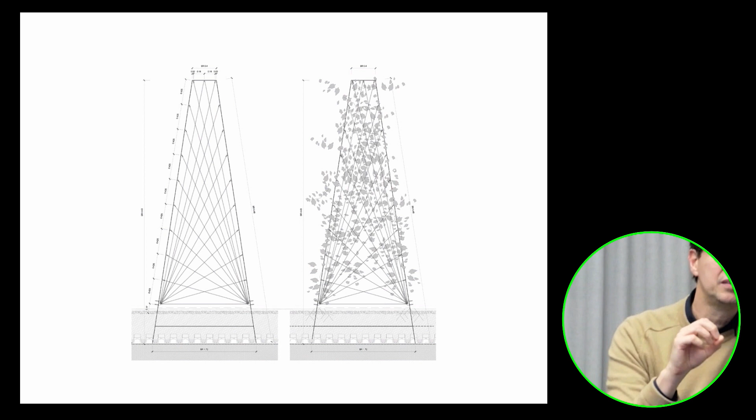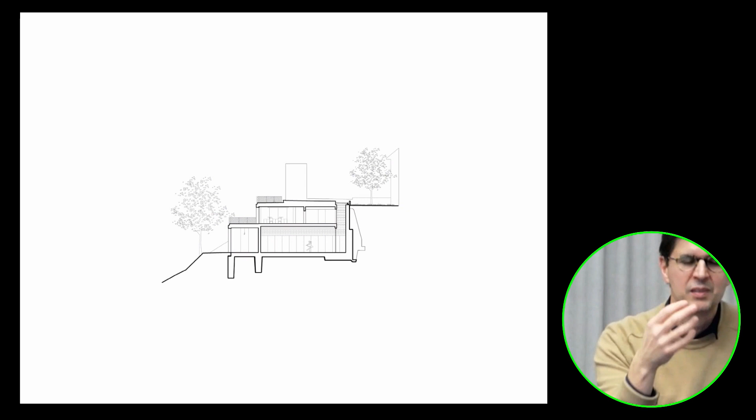The idea was to understand that in this case, belonging to a landscape means trying to blend nature and architecture in a very sensitive way, using the triangular shapes as the elements that define how nature could be introduced again into the building, how this could characterize the light inside, and how the building appears as part of the landscape. It was not just about how to materialize the object, it was about understanding the character of this place, the atmosphere, to incorporate the building into this idea of landscape.

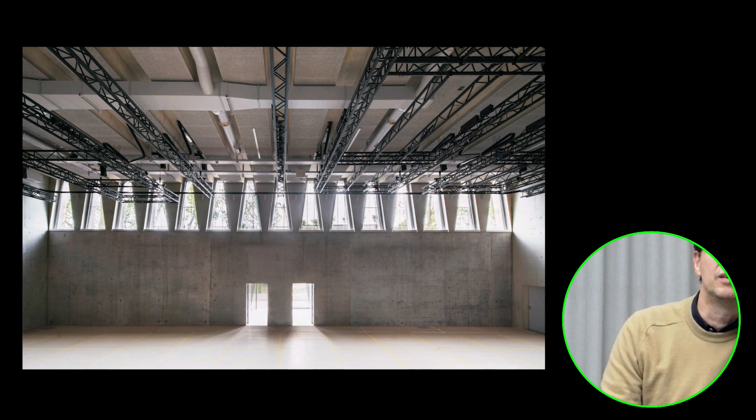Inside, the theater is characterized by these simple forms where light appears as the engine or guideline in all the spaces. Outside, the building appears as a kind of background where the most important thing is not the object itself, but this idea of landscape, composing a new reality for the site, based on the essence of what we find in the places where we work, trying to recover the uniqueness, respecting the context, but taking the context a step beyond.

I think that's the main responsibility in Prague, to try to, even understanding that we are going to reinvent the site, understand the essence of this site and take it beyond the limits of these characteristics, trying to rediscover the uniqueness of this place.

Thank you very much.

Thank you too, it was a beautiful lecture. I have one question. When you work on a conversion of some industrial building, like a railroad building, an old factory or something like that, there is always some community that used to work there or exist around the building. Do you suggest talking to the people or being inspired by them?